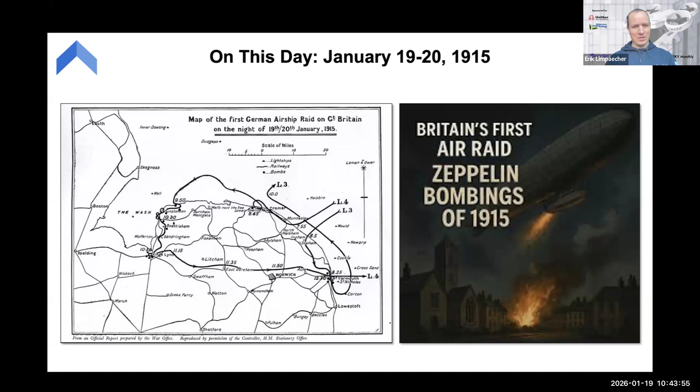Today is actually a very interesting, unique day in hydrogen aviation history. On this day, 110 years ago, was the first air raid on Britain from hydrogen-lofted Zeppelins. Quite a coincidence - a little bit different from the MLK theme, but given that we're focused on hydrogen aviation here, I thought I'd mention that.

The use of hydrogen for lift gas has 160 years of history, dating back to the Civil War, where hydrogen gas generators were used to loft balloons for surveillance. In the First World War, over almost 6,000 hydrogen fuel missions were carried out with these 2-person aerostats for artillery spotting and surveillance, transporting the gas from French factories in compressed gas cylinders.

Then in the Second World War, the M1 hydrogen generator was used to loft barrage balloons - you can see these over the beaches of Normandy. They were also lofted over Buckingham Palace in London during the air raids to protect against aircraft. They used caustic soda to produce hydrogen using these mobile hydrogen generators.

Today, DLA supplies hydrogen to the DoD. It comprises 5% of all DLA hazmat shipments. The Army is in the process of establishing high altitude balloon platoons in both the Pacific and in Europe.

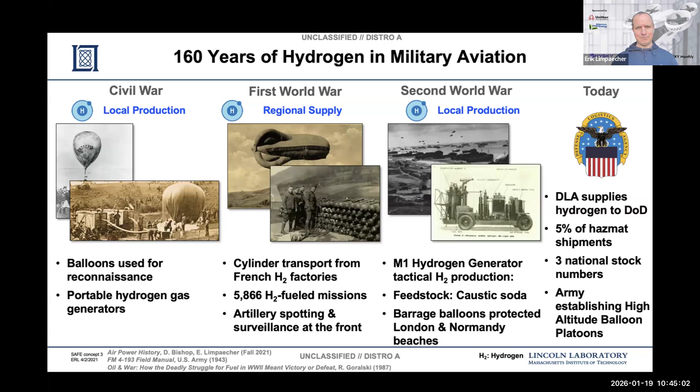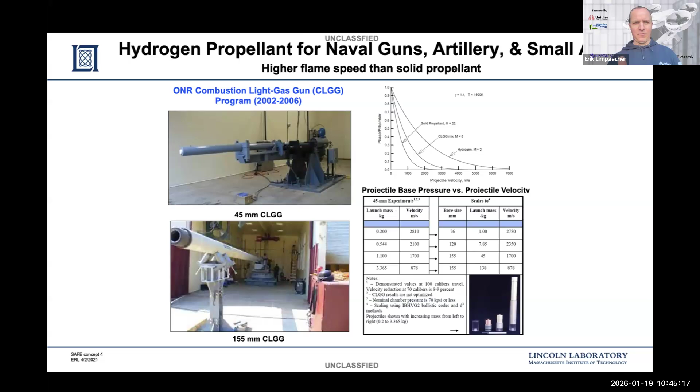But lift gas is not the only application for hydrogen. The Navy's developed combustion light-gas guns that demonstrated 30% higher muzzle energy by combusting hydrogen and oxygen for 45, 105, and 155 millimeter guns.

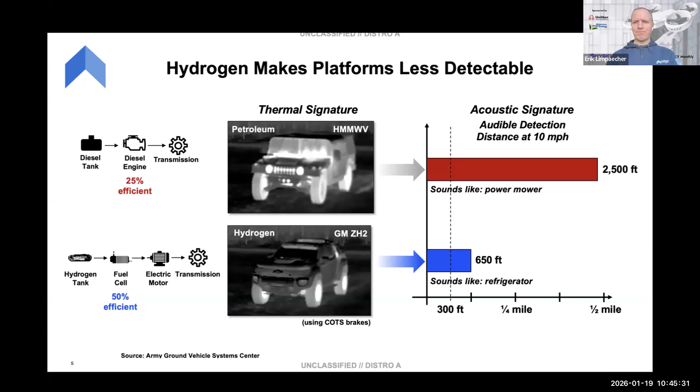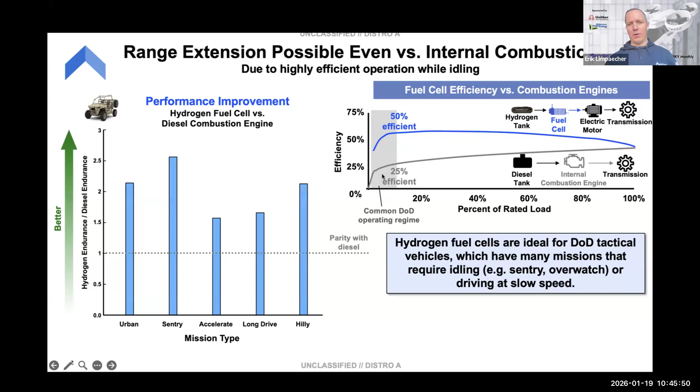Hydrogen has been demonstrated to provide significantly reduced thermal signature and acoustic signature compared to combustion engine systems. Through some analysis, we've also shown that hydrogen can provide significantly increased range compared to diesel-based combustion engine vehicles, because hydrogen systems tend to run at much higher efficiency at lower operating load levels compared to combustion engine vehicles.

Furthermore, hydrogen has been shown to be very safe. On the left, you see a video of a Toyota Mirai tank being struck by a 50 cal, and you can see that the exhaust of the hydrogen actually prevents any ignition. On the right-hand side, you can see tests done by University of Miami showing that hydrogen, when handled properly, is actually safer than gasoline-based fuel for vehicles. I'll let that video play for a second.

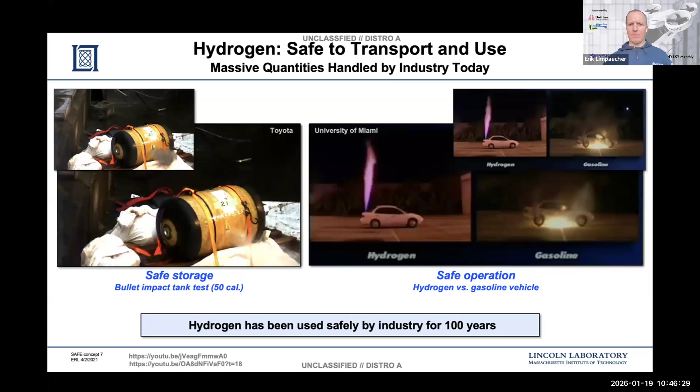As we look to other applications, as you all know, hydrogen has significantly higher energy capacity compared to batteries. So today, we could see a 3 to 5, or further, 3 to 8x improvement in the flight endurance of UAVs. It's interesting to compare that to the improvements in battery energy density over the last 50 years: batteries have improved by 7x over 50 years, and today, by switching to hydrogen, we could dramatically improve the energy density compared to batteries.

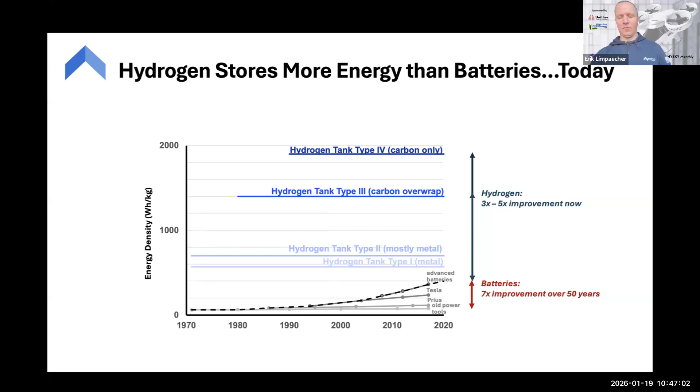Which is why there are so many companies developing hydrogen-fueled drones by removing the batteries and using that same battery electric powertrain to fuel hydrogen electric systems, as well as a pretty robust ecosystem providing battery to hydrogen conversion kits for primarily Group 2 and Group 3 UAVs. I've seen IAI and SkySyn developing or converting combustion engine Group 2, Group 3 UAVs to hydrogen due to improved maintenance and reduced acoustic signature.

So that's a quick run through of some defense applications. We've seen a lot of interest from the Special Operations Command and the Army in contested logistics. The basis for that is that petroleum has historically been a challenge for military operations and is frequently the first thing targeted by the adversary.

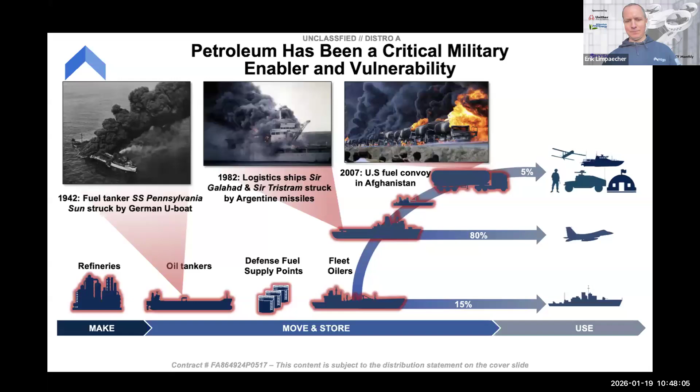Good news is that there are many other sources of energy in places where the U.S. military might want to operate, and many of those can be used for producing hydrogen. You can use coal, you can use natural gas, you can use electricity, and you can now also use aluminum.

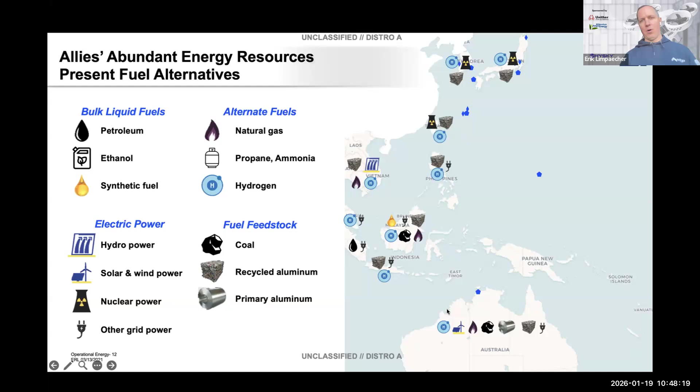So a potential solution to contested logistics is to use local available fossil or electric power sources to produce hydrogen regionally and then transport it, or operating at the tactical edge, you can take aluminum, mix it with water to produce hydrogen on the spot. That technology is what Edge has been focused on commercializing.

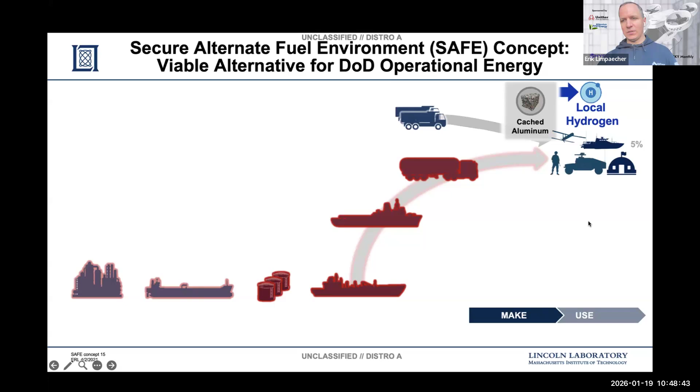When you look at the map, there's some pretty interesting use cases in terms of using aluminum as a sovereign fuel, the ability to take locally sourced either primary or secondary aluminum and turn it into hydrogen or use it as a fuel source.

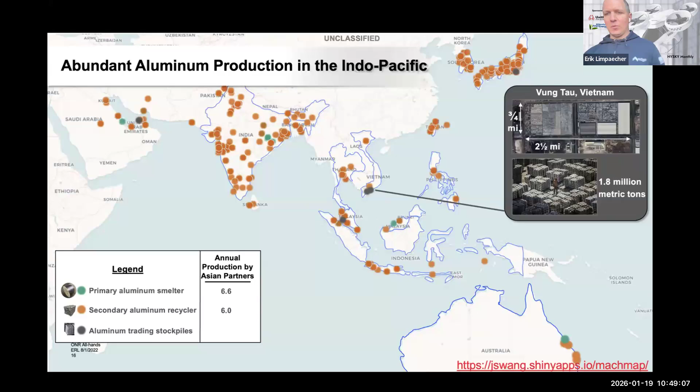Furthermore, given that aluminum is a globally traded commodity, there are large stockpiles in certain areas. This one site in Vietnam, which has an aluminum stockpile 2.5 miles wide by three-quarters of a mile deep and taller than a person, has as much energy using our technology as the entire Navy Red Hill fuel depot in the Pacific. So significantly large quantities of energy are being stored in the form of aluminum around the world, now accessible using our technology.

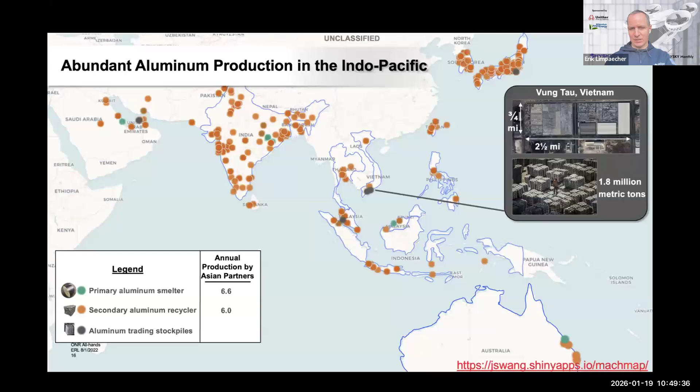When you compare aluminum-based hydrogen to petroleum, there are some significant benefits. We see about half the volume and about 10% more weight. You can use any type of water along with some additives to produce hydrogen, and because it's a chemical reaction, we can do the reaction in a pressure vessel, and that system can then pressurize a reverse osmosis system to do water purification.

So, quick run through as to why the Army, SOCOM, and Marines are interested in aluminum and hydrogen specifically as a contested logistics solution, not as a way to replace diesel, but as a way to augment or increase the number of options that they have.

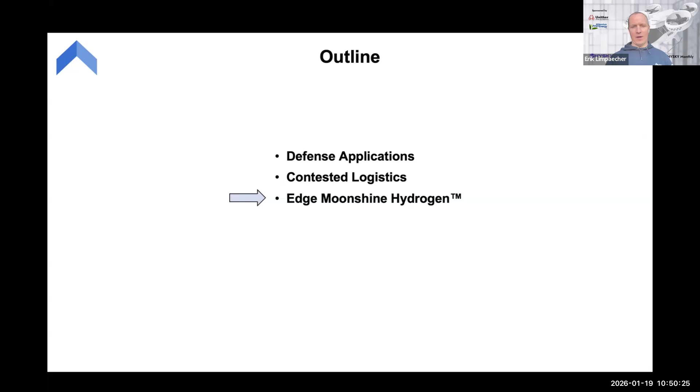So now I'm going to get into the moonshine hydrogen technology we've been developing to meet those needs. This video shows what's happening inside of our reactor. The aluminum has its oxide layer disrupted, that's why it doesn't look so shiny. When it's exposed to water, aluminum oxidizes inside the water, rips the oxygen molecules off the H2O to produce aluminum hydroxide, that's the gray material there, and then allows hydrogen to go free. All those bubbles are hydrogen being produced with no electricity needed and using any type of water.

I used to have a Marine Corps colonel who liked to sabotage my demos by pouring hot coffee over the aluminum, starting the reaction and producing hydrogen using the water from the coffee.

We've done significant work on this technology at MIT Lincoln Laboratory. We've got exclusive license to over 10 patents from MIT. We did systems like the hydrogen tactical refueling point, which enabled a handful of Marines to produce hydrogen for fueling UAVs and powering a combat operations center, producing power. We've done balloon launch projects and a number of other projects while at MIT from 2018 to 2024 when we spun out the company.

So Edge is now commercializing this technology using one fuel for many applications. The simplest thing you can do is fill a balloon, a Helikite or high altitude balloon, carry a communication relay up in the air and provide over the horizon comms and sensing. You can run a fuel cell to produce electrical power. You can use the pressure produced by the chemical reaction to pressurize a water filter for water purification. And you can also self-pressurize up to 5,000 psi to refuel unmanned systems.

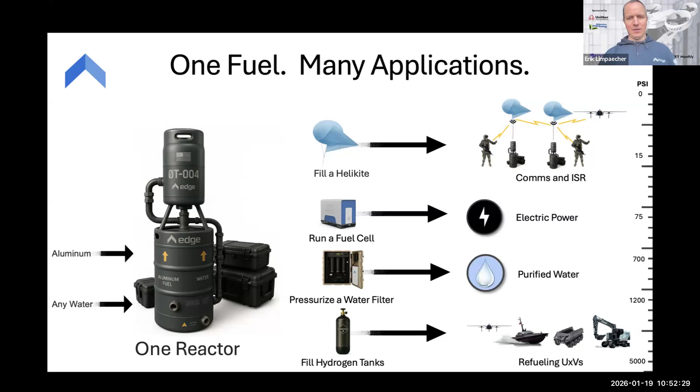So all the way from ambient pressure up to 5,000 psi are enabled by two reactors. This is our low pressure reactor, and we're also developing a higher pressure reactor for expeditionary applications. We group our work into three domains: air domain, which is aerostats and drones; ground domain, which is power generation and water purification; and maritime domain, where we basically take the ground power system, put it on a watercraft, and effectively build an ocean sipping watercraft, where the watercraft carries the aluminum and can ingest seawater for the reaction.

So the technology is as simple as pouring raw aluminum into the reactor, and then the reactor does all the mixing with water and thermal regulation in order to make the reaction work.

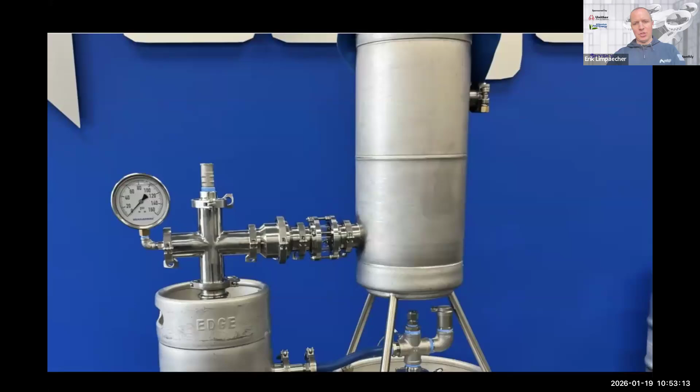So this is an early demo, an early test we did, producing several hundred grams of hydrogen in about 15 minutes. We've done as fast as a kilogram in 5 minutes. That was a very sporty reaction. This one shows a much more mobile system using environmental water.

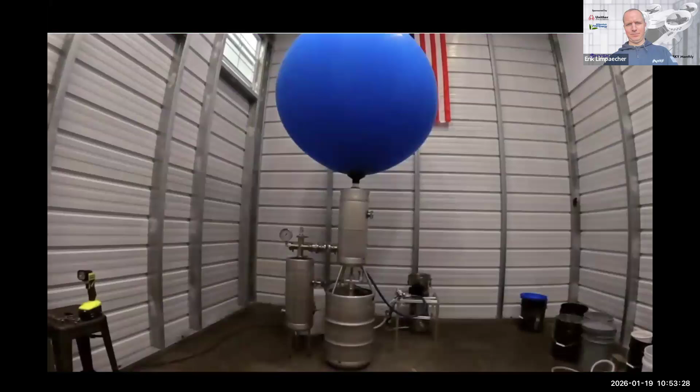One of the earliest tests we did was we brought this to Michigan, to Lake Huron. We participated in the Navy's Silent Swarm exercise. We took water from Lake Huron along with aluminum, mixed it in the reactor in order to loft an aerostat. That aerostat was able to integrate with a number of different communication payloads, both our custom developed Growler radio.

Which operates below the noise floor, using a LoRa-based network. We've also integrated with GoTenna and Domo Tactical and Chatterbox. All those systems were able to communicate over the horizon because of the additional altitude that we brought them to, which enabled some pretty unique capabilities.

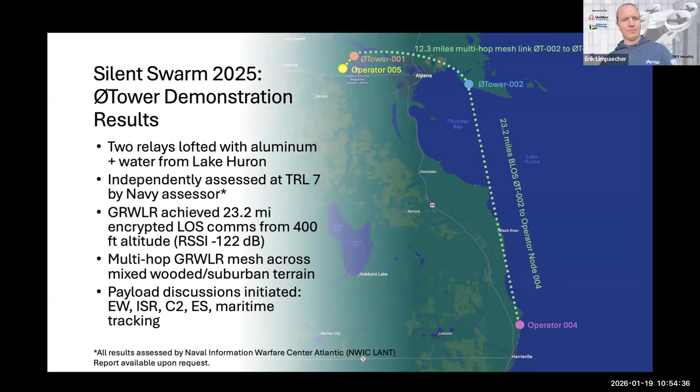Flying just at 400 feet, you're able to demonstrate 23 miles line of sight communications, where typically if you have a radio at eye level, you can only get about 3 miles best case. We also demonstrated multi-hop mesh communications by lofting 2 aerostats and having multiple operators communicating over the entire AO of the exercise. This technology was assessed at TRL 7 by the Navy.

Looking forward, based on that test, we were selected into the NATO DIANA program. Since then, we've been engaging primarily in Eastern Europe with the idea of building what we call microfactories. We can take locally sourced aluminum, chip them into usable pellets that our reactors can use, basically glorified gumball dispensers. Then that aluminum can be used to feed reactors that can loft aerostats for enabling wide area communications and sensing, as well as fueling of hydrogen ISR drones.

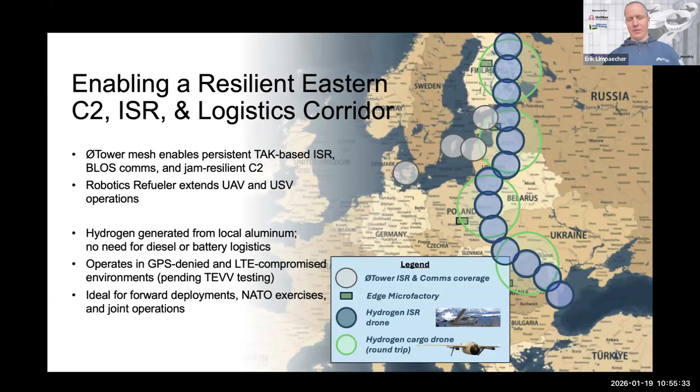This right here, for example, is the Zephyr Z1, for enabling cargo drones and significant range on those as well. So, one technology, one fuel, common set of reactors, enabling a range of applications in some interesting places of the world.

Looking ahead, EDGE has several Special Operations Command contracts to develop both remote power generation, water purification, and drone pressurized fueling. We're about to kick off an Army project as well. We're engaging with 2 program offices, both in the Army and the Special Operations Command for power generation.

We're recognized as being in the top 3% in technology solutions for Army contested logistics and the top 1% of technology solutions for NATO DIANA. We are currently standing up an air launch operations team to operationalize our capabilities globally. We're engaging with a Pacific Island nation, a country in Africa, flying to a remote island in the Southern Atlantic, as well as Eastern Europe. These include both aerostats, high altitude balloons, tactical power, and drone fueling capabilities.

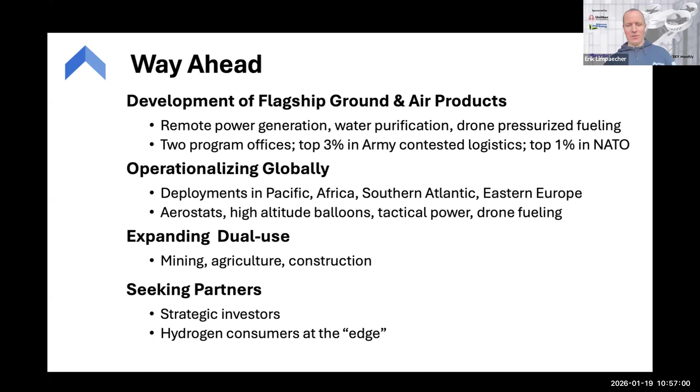Thanks to some of our investors, we're expanding into the mining, agriculture, and construction space. So anybody who has needs for either sensing or communications or remote power. We're seeking partners, both strategic investors and folks who may be on this call, hydrogen consumers at the edge. So if you're finding that hydrogen supply or hydrogen pressurization in the areas where you're operating are challenging, we'd definitely be interested in speaking with you.

This is definitely not a one-person show. The leadership team is incredibly talented. Mark has been developing autonomous systems for the past 25 years.

Doing his work at MIT Lincoln Laboratory, he's also an instructor in robotics at MIT. He's developed unmanned systems operating under sea, land, air and space. He even developed a self-guided bullet.

He's been the person who addressed all the challenges with aluminum as a fuel. Many other people working with aluminum require either powdered aluminum, which is explosive and an inhalation hazard, or they require precious metals that are consumed, or require complex or heavy equipment for the aluminum production, or they require the aluminum to be water reactive and hazmat. Mark is the one who solved all those challenges, enabling moonshine hydrogen to be a commercially viable solution.

Alex is an Army veteran. He advised two presidents in the White House, and he's been doing disaster response deployments throughout the world over the last 15 years. He's also the team lead for the Roddenberry Foundation Disaster Response Team, which is the philanthropic arm of the Star Trek franchise. That's how he and I actually met.

He's been managing government contracts for many years. So these are my co-founders. The team is small, but very nimble and fast moving, and I look forward to your questions.

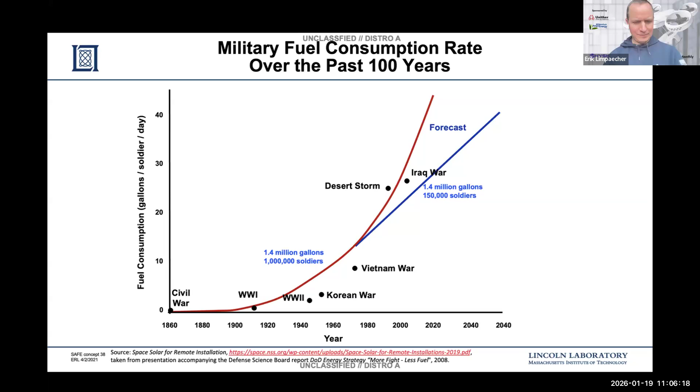Really appreciate this presentation. I'm with the San Diego Airport, and we're looking at several options for alternative power. One is emergency power, for times when we anticipate some sort of energy blackout — we currently use diesel generators, that's the standard. I don't know how this could potentially replace diesel generators for emergency power for our terminals. The second is we're also using a significant amount of solar to power our terminals. We know how much solar energy we can generate on a per square footage basis, but how would we replace solar with aluminum-fueled hydrogen, and how much energy would we generate, maybe not per square footage, but per pound of aluminum? Third, we're also looking at powering fleets, converting our current ICE fleet into something using fuel cells — how would we do that affordably using aluminum-fueled hydrogen generated at the source? Right, so those are my three questions.

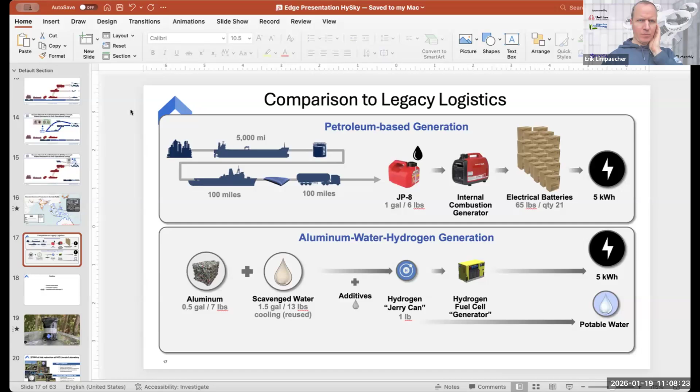So in terms of comparison against diesel, aluminum produces twice as much energy per given volume, and about 10% less per given weight. Another interesting point is that it can be stored outside in the elements without worrying about environmental contamination. People always worry about leaking diesel tanks and keeping their diesel fuel fresh, having to refresh it every year. Those problems don't exist with aluminum as a feedstock.

Also, the construction industry is interested in aluminum as an energy source because of reduced noise emissions and reduced particulate emissions. There's almost no noise because the chemical reactor and the hydrogen fuel cell are nearly quiet, and there are no particulate emissions either. So from both an EPA standpoint and a backup energy stockpiling standpoint, aluminum provides significant benefits compared to petroleum.

It's challenging for a new energy technology to compete against electricity and diesel, which have had over 100 years behind them coming down the cost curve. But if you're using it as a backup power source, it can provide significant benefits at a comparable or competitive price compared to petroleum.

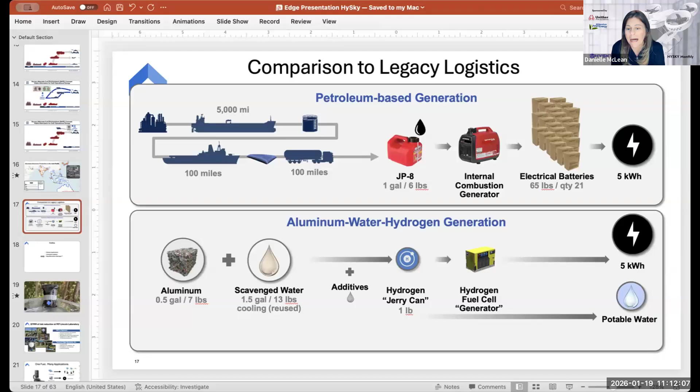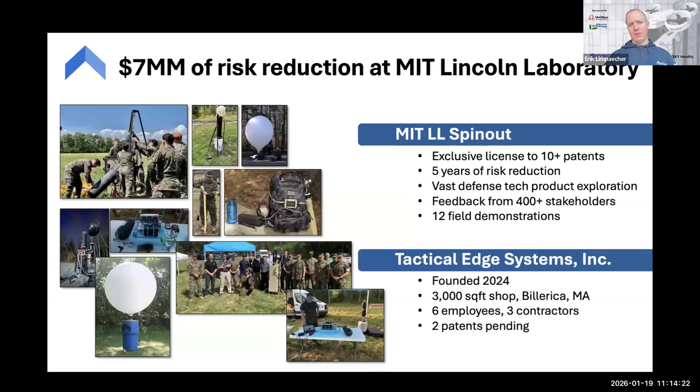So the challenge is the water, right? Water is heavy. That's why when we illustrate our air, ground, and maritime systems, the air system uses reactors on the ground that act as a mobile gas station. The ground systems produce hydrogen and it's consumed on demand, so as soon as you produce it, the fuel cell consumes it and produces electricity. The maritime is what you were envisioning, where you have the reactor on board the platform. It carries aluminum and can also ingest water from the environment and produce hydrogen on demand.

And then you guys make the pellets, correct? Yeah, that's your entire... that's a fairly straightforward mechanical processing step.

What's the energy requirement? Total all-in energy to take the raw aluminum, let's say in some form factor like a sheet, process it, put it through our reactor where the water pumps operate and consume a little bit of electrical power, and then produce electricity through the fuel cell — all in, we consume about 1.8% of the energy that comes out.

Aluminum has twice the energy density of diesel, 8 kilowatt hours per kilogram, maximum 8.6 kilowatt hours per kilogram. Massive amount of energy — that has come from somebody putting the energy in, right? You start with bauxite, and the smelting process for aluminum is very electricity intensive, so all the energy is embedded in the aluminum. We're basically recapturing that energy that somebody else at the smelter put in, and because we're just doing mechanical and chemical steps, it's highly energy efficient. Again, only 1.8% of the energy that comes out do you need to put in for release.

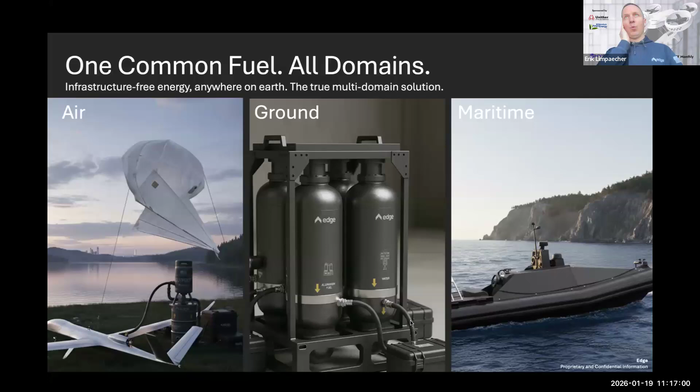So we're producing aluminum hydroxide, which is actually the main ingredient in indigestion medicine, so in theory it could be a medical product. We're not necessarily producing it at the purity you'd want for pills, but it is benign. We've run EPA TCLP tests on it, and the EPA has found there's nothing hazardous or toxic in it. Because it's effectively going back to producing bauxite, it's effectively dirt. At some locations where we've tested, we've gotten permission to dispose of it on the ground because it effectively turns into dirt within about 24 hours.

And my second question is, what is the advantage of the aluminum-water hydrogen fuel cell versus the aluminum-air battery? What advantages do you see? So the aluminum-air battery produces electricity natively, and that's the only thing it does.